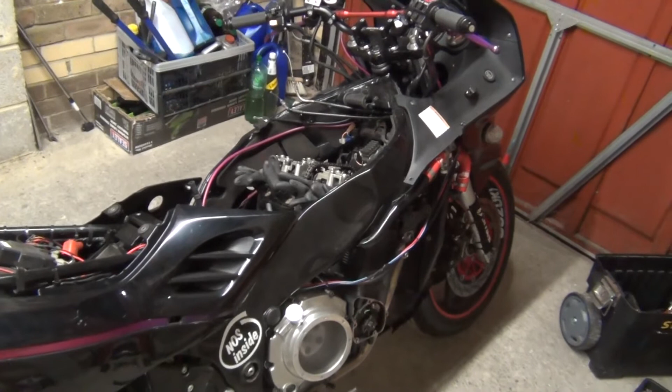Today I'm doing valves adjustment. So I highly encourage you to watch my previous video relating to this subject, which was valve clearance check. You can find this video in the description box here, or just rummage through my channel.

In that video I showed how to remove every single component required to be removed to do the valve clearance check. So this is going to be removing the fuel tank, airbox, carburetors, ignition coils, valve cover, right hand side fairing, and the signal generators cover as well.

Once you have everything exposed, you'd want to block those cylinder head inlets here with some rag or whatever, just to make sure nothing drops in there. And now I'm going to perform once again the valve clearance check, and then I'm going to do the adjustment procedure too.

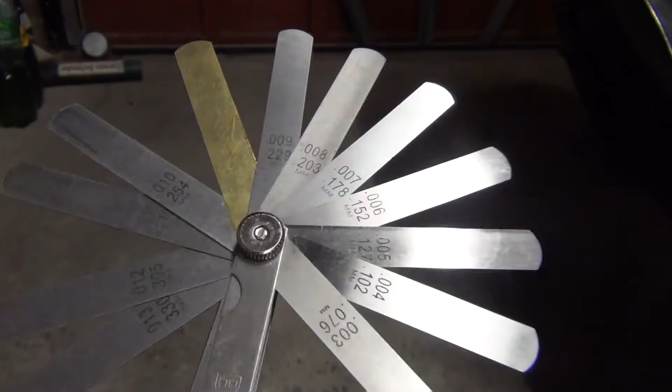Right, so for the RF900, the service manual specifies what would be the safe range for the valve clearance for intake and exhaust. So for the intake, this would be from 0.004 of an inch up to 0.008 of an inch, and for the exhaust that would be from 0.008 up to 0.012 of an inch.

So why would you have two values on those feeler gauges? The top value, like this one, .008 for instance, this is fractions of an inch, and the bottom value, it says mm here, that's fractions of millimeter. So you can do it whatever way you want. If you feel more comfortable with inches, go with inches. If you feel more comfortable with millimeters, go with millimeters.

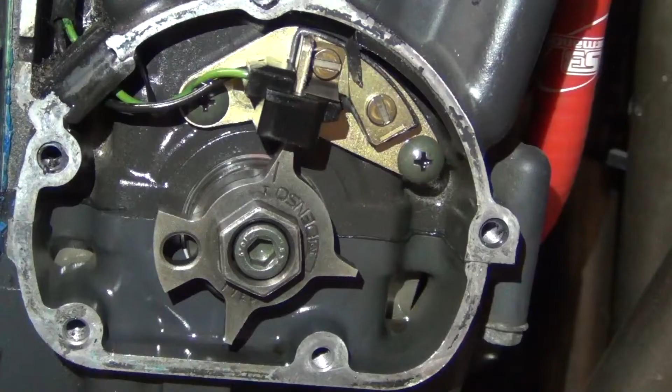Okay, so first step, you've got to bring your T mark. You see there's a little letter T just here with a little line pointing towards this pickup coil. This is the position that you want. So by using a 19mm spanner, you grab this signal generator and you basically turn it clockwise to get the desired position, and that's what you want. T mark pointing towards this pickup coil.

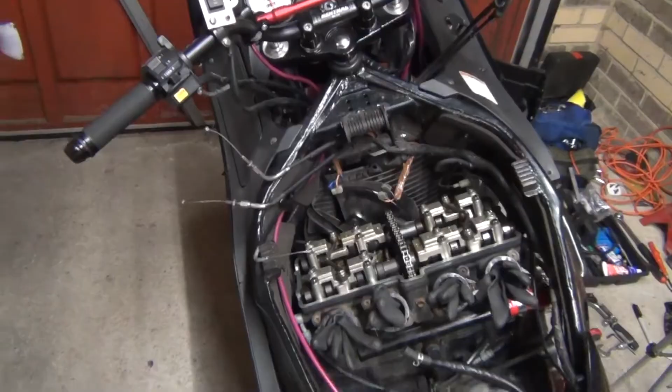And then you've got to make sure that the camshafts are also set up in the correct position. So let me show you what this should be. Alright, so going towards the right hand side of the motorcycle, you will see intake camshaft here, exhaust camshaft there, and what you want is you want the lobes to be pointing towards each other. So you see this intake lobe is pointing towards the front of the motorcycle, and this exhaust lobe here is pointing towards the rear of the motorcycle. So they're pointing towards each other.

And just to make sure your camshafts are 100% correctly positioned, on their sides there's going to be timing marks, and they should be positioned like this.

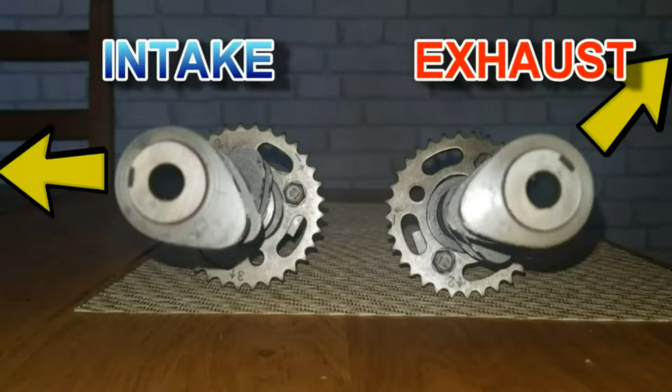Okay, so with this position of camshafts and crankshaft, and with the T mark pointing towards the top, we're going to be measuring what's circled red, which is exhaust valves on cylinders 1 and 2. So this is going to be 1 and 2, and intake valves on cylinders 1 and 3. So this is going to be 1 and 3.

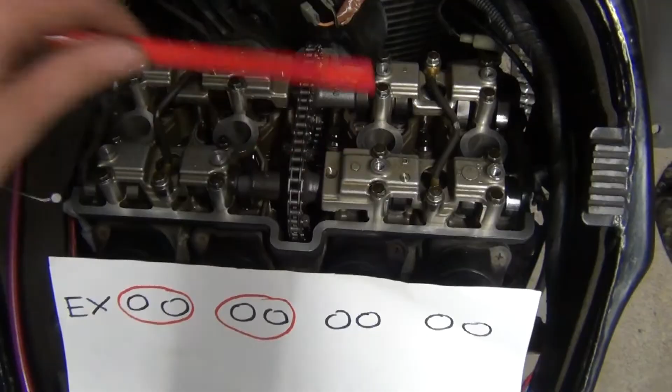Okay, so I'm going to start with the exhaust side, cylinder number 1, and the specification for those valves is at least 8 thou of an inch, which is 0.203 of a millimeter. So let's put it in. It goes in very easily.

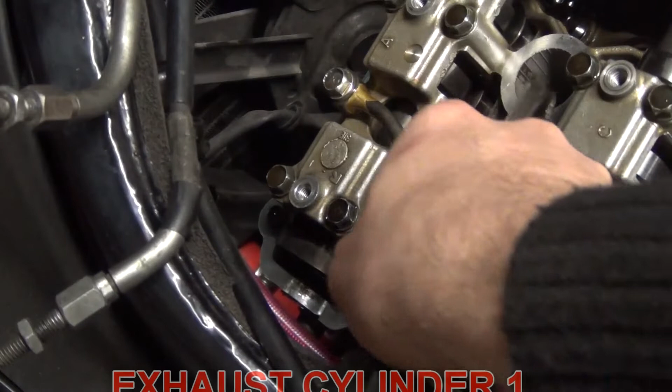And the reason why we start from the bottom is because we want to make sure the valves aren't too tight. When your valves are loose, that's not ideal, but it's not going to harm the engine. When your valves are too tight, it's bad news. So we always want to check that the valves aren't too tight. So we know this valve is definitely not too tight. So we can now go ahead with 10 thou, which is 0.254 of a millimeter. And that fits easily too.

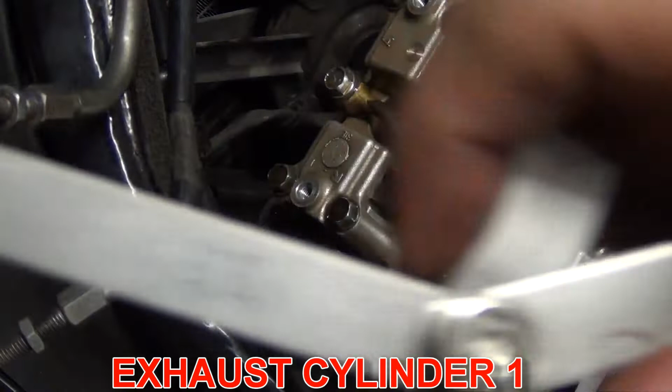Okay, so I'm gonna go straight over to 13 thou, just to make sure they're not too loose, because the maximum specification for those exhaust valves is 12 thou. So let's have a look if the 13 goes in, and it does not. Let's see if the 12 thou goes in, which is the maximum specification.

See? And 12 thou goes in with a drag, so I actually have to force it a bit, but not too much. So we can then say that those two valves on cylinder number 1 on the exhaust side are 12 thou. Okay, so we've just measured cylinder number 1 exhaust side, and what we've got was 12 thou of an inch on both valves.

I'm going to record the inch values at the top here, and I'm going to record the millimeter values here at the bottom. So that was 0.305, 0.305. Alright, so we've measured the cylinder 1 on the exhaust side. Now we're measuring cylinder number 1 on the intake side. And the difference here is that you're going to be putting the feeler gauges in from that side.

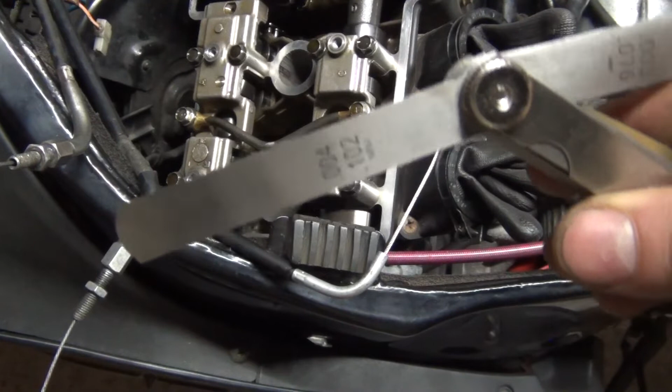Okay, so the bottom specification for the intake valve is 4 thousandths of an inch. So let's check that. It goes in very easily. Same on the other one. So we know that the valve isn't too tight. So I'm now going to jump straight onto 7 thou, which is 0.178 of a millimeter. Let's see if that fits. That fits for the first one. And that fits for the other one as well.

The top range for the intake valve is 8 thou of an inch, which is 0.203 millimeter. Let's see if that goes in. It does. Okay, right, so let's check the 9 thou, which is 0.229 of a millimeter. And that goes in with a drag. Okay, let's just make sure that 10 thou doesn't go in. So 10 thou, which is way over the specification, and that doesn't go in

both. Alright, so we've just measured cylinder number 1 on the intake side, and the left valve was 8 thou of an inch, so 0.008, which is 0.203 of a millimeter, and the right valve was 9 thou of an inch, which is 0.229 of a millimeter.

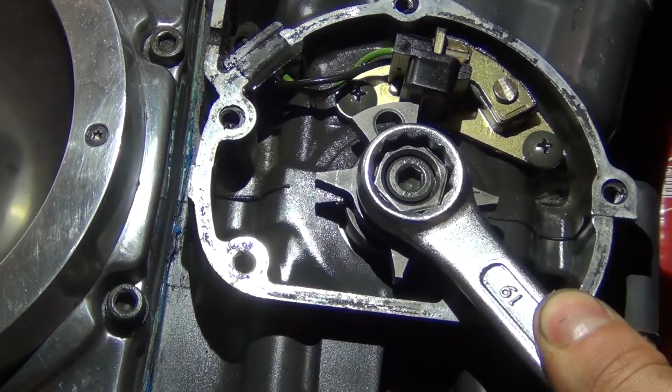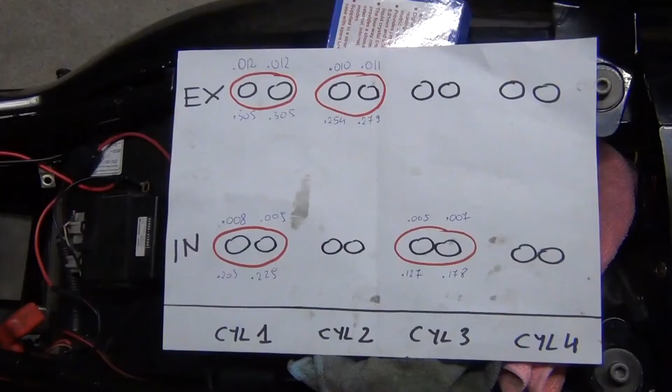So to measure the clearance on the 8 remaining valves, this rotor has to be turned 360 degrees clockwise. So once again, we've got a T mark pointing towards the pickup coil. Let's do that now. Okay, so it's in the same position but turned 360 degrees. And have a look at the camshafts now. Right, because we've turned the crankshaft 360 degrees, the lobes on the right hand side of the engine are pointing away from each other. Now with this position of crankshaft and cams, we're going to be measuring clearances on the remaining cylinders, which is cylinder number 3 and 4 on the exhaust, and cylinder number 2 and 4 on the intake.

Okay, so I'm going to start with the intake side on cylinder number 2, and we're going to go with the bottom of the range, which is, hopefully you can see this, 4 thousandths of an inch, which is 0.102 of a millimeter. So on the intake side, we attack the valves from this position. Goes in really easily for that valve. Goes in really easily for the other valve too. Okay, so 5 thousandths, which is 0.127 of a millimeter. Goes fairly easily on that side and on the other one as well. Okay, there we go. We're going to 6 thousandths.

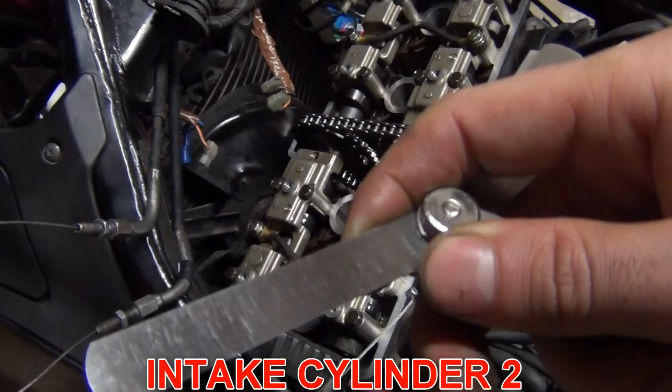Still goes in. Oh, actually it will be very hard. Let's just check 7/1000 on the left valve. No, it wouldn't go in. So we can call it 6/1000 on both valves.

Okay then, so I've measured all the valves and I think I'm going to go with adjusting 4 of those. It's the valves with little red cross inside them. So I'm going to adjust those two, and then on the intake side I've only got 2 valves, which is the right valve on the cylinder number 1 on the intake, which was 9/1000, just a bit too loose, so I'm going to get this down to 7, maybe 8. And then weirdly, left valve on cylinder number 3 intake side is, I wouldn't say it's extremely tight, but you know, 5/1000. I would want it to be 6/1000 to be perfect.

To make valve adjustments, unfortunately you have to remove a lot of components. So we're going to start with removing of the cam holders. Then you're going to have to remove the cam chain tensioner, which is just there. And then you're going to have to remove the camshafts, and on top of that you're going to have to remove the tappets to get access to your little shims.

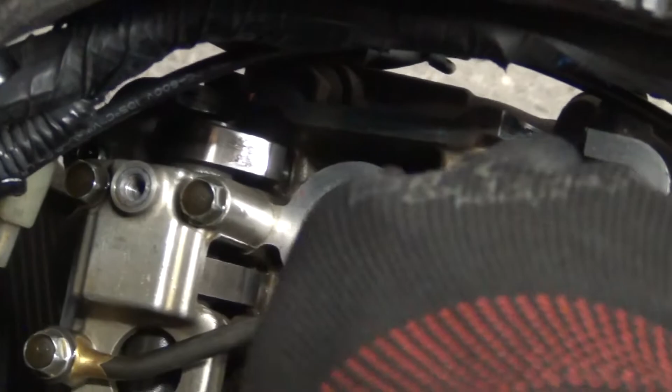First, let's just bring the T mark to the top again, and the camshafts have to be in the starting position, which was both lobes pointing towards each other. So this is the intake lobe pointing towards the front of the motorcycle, and exhaust lobe pointing towards the rear of the motorcycle.

Little tip, you've got to have your inlets covered with something just to make sure nothing drops inside the engine. And as you can see, I've got a little rag there just below the cam sprockets, and that's because there's a big hole which exposes the crankshaft. So what might happen is you might accidentally drop a tool or a bolt or a socket inside there, and then it's game over. So I've got a little rag over there just to make sure nothing drops in there.

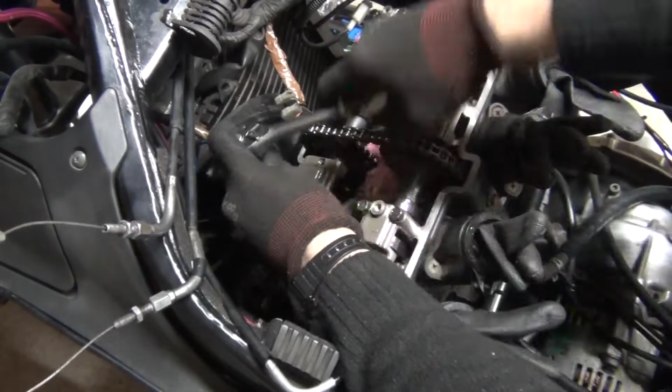Just half a turn to make it released. Just half a turn. Again. The thing is, you want to release that stress from the head really evenly. A few moments later. So first I'm going to remove those oil pipes.

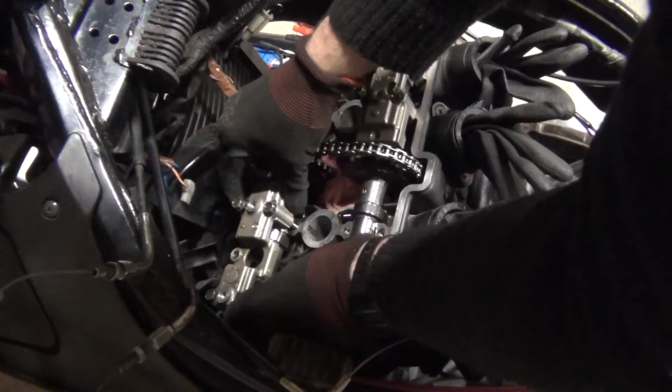Now I'm going to be removing the cam holders. So just a bit of a wiggle action gets them out. Okay, and that one. All right. Okay. And the next one comes out. Excellent.

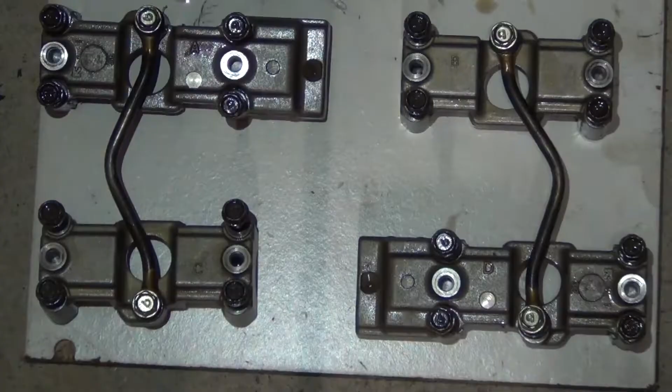And you see, this is what I was talking about. Look how close it was to drop this dowel pin somewhere in the engine. So you've got to be really, really careful and pay attention to what you're doing. Of course, it's very much recommended that you keep them exactly the same way as they came out. So you see, this is your cam holder A. This is your cam holder B. Then you've got C here and D here with oil pipes exactly the same way as they came out.

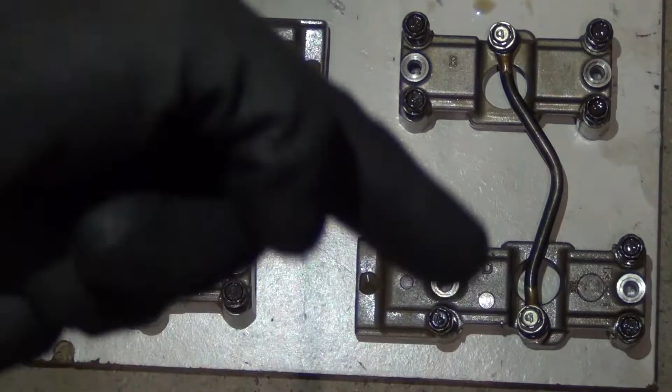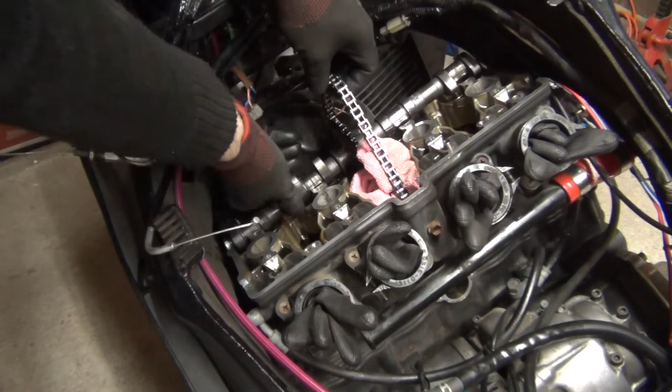Go by hand now. There we go. A little pop and the tensioner comes out. Okay, so we can now finally remove the camshafts. So I'm going to start with the exhaust side. I'm going to lift this chain here, get it off the sprocket and delicately rotate the cam and get it out. I'm going to do the same with the other cam. Excellent. And just not to drop this chain, I'm going to attach it to that hook here.

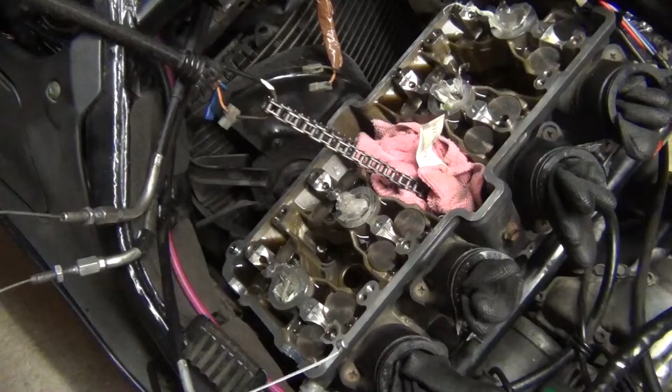Right, so just about to remove the tappets so we get access to the shims. So as you can see, you've got your tappets here. This is 1, 2, 3, 4, 5, 6, 7, 8, and then 8 tappets on the exhaust side as well.

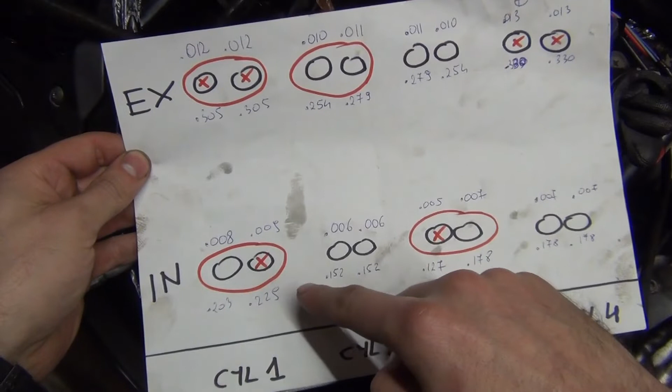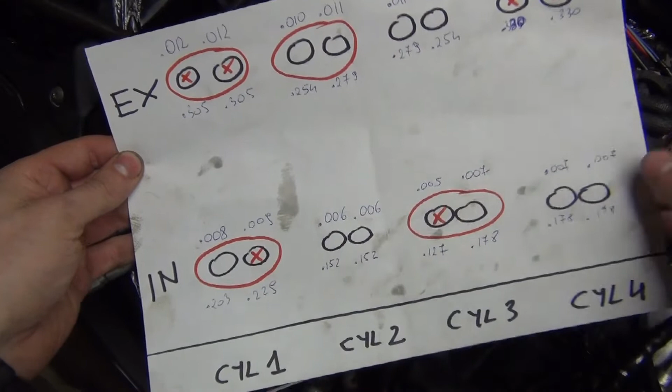So just looking at the diagram, we're going to be removing tappets to expose intake cylinder number 1 for the right hand side valve and intake cylinder 3 for the left hand side valve. So to do that, you're going to have to use a magnet. I've got this really cool magnet with a little light at the end of it. So this is the tappet that we're exposing.

It simply lifts up, and be careful because there's a shim just underneath it, so you don't want to drop it anywhere. So be very, very gentle and slow. And here we have it. There's your little shim underneath it. So let's now remove that little shim. Now that's what it looks like inside with the shim removed.

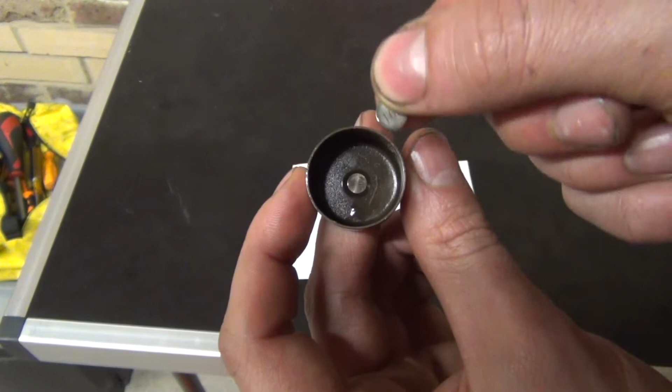And as you can see, on one side you've got that little circle, but on the other side you actually have a value stamped. Now in many cases those values will be wiped out. Unfortunately you won't be able to see them because constant tapping of the valve on that tappet will cause friction and that number will disappear, but in this case we can actually see that it's 165.

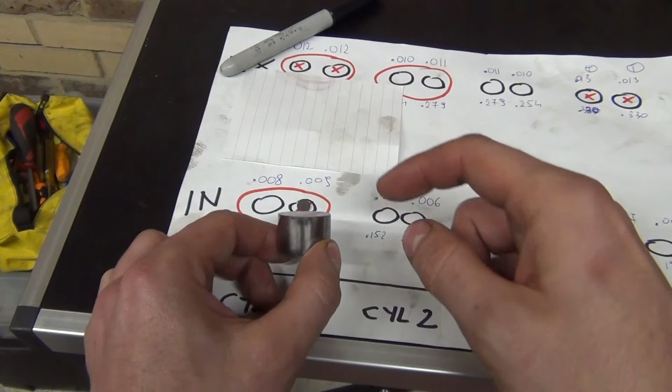Okay, so here we have our shim on that valve that was slightly on the loose side. As you can see, the measurement was 9 thousandths of an inch, which is equal to 0.229 of a millimeter. Now to reduce that clearance between the tappet and the cam lobe, so imagine my finger is a cam lobe, we would have to put in a thicker shim. A thicker shim under this bucket would cause the bucket to go up, meaning the clearance between the two gets smaller.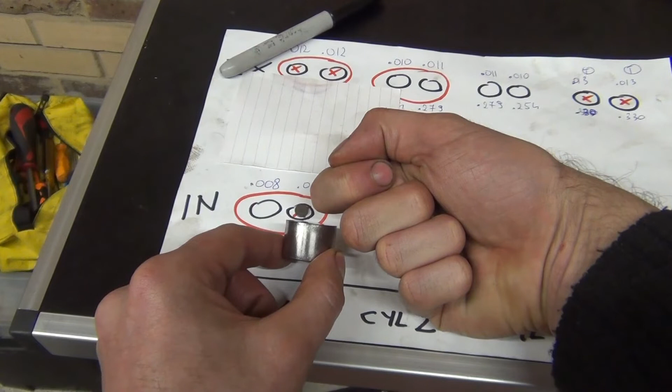Now, if you had not enough clearance and you wanted to increase the clearance, obviously you will be putting in a thinner shim, which would mean that the clearance increases because the shim underneath is thinner. Now Suzuki gives you an assortment of shims and they go up in increments of 5 hundredths of a millimeter. So this particular shim is 1.65 of a millimeter. If we want to reduce that clearance, we can go up one size, which is 1.70 of a millimeter. Alright, so let's just have a look at that.

So what we know is that with the current shim with a thickness of 1.65 millimeter, our read clearance was, as you can see here, 0.225 of a millimeter, and we need to reduce that clearance by putting in a thicker shim, which is 5 hundredths of a mil thicker, 170. Then we will know that 0.225 of a millimeter minus 0.05 will be equal to 0.175, which is our desired thickness. As you can see here, 0.175 is about 7 thousandths of an inch, which is in the middle of the specification.

Alright then, so here we have another tappet, which will have the shim inside. This is from cylinder 3 on the intake side, left hand side valve, which read 5 thousandths of an inch, which was 0.127 of a millimeter, which to me is still okay because it's not very tight, but I would rather prefer this to be 6 or 7. And let's have a look what's going to happen here.

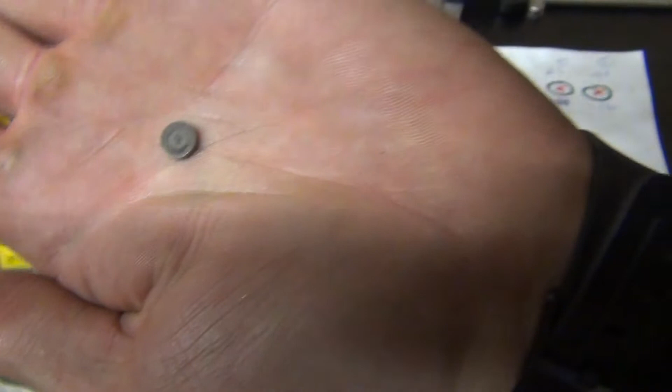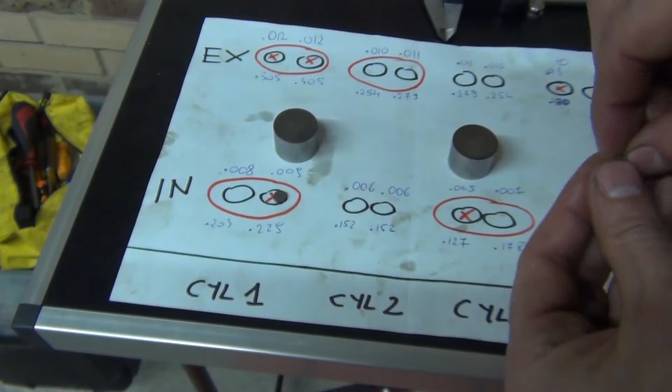So here's your shim inside, and if I now remove it, what you'll see is that on one side there's nothing that you can see, and on the other side the numbers are washed away. You could probably try to read this, and I think it's actually saying something like 130 or 160, one of the two. But to be 100% accurate, you would have to use what's called a micrometer.

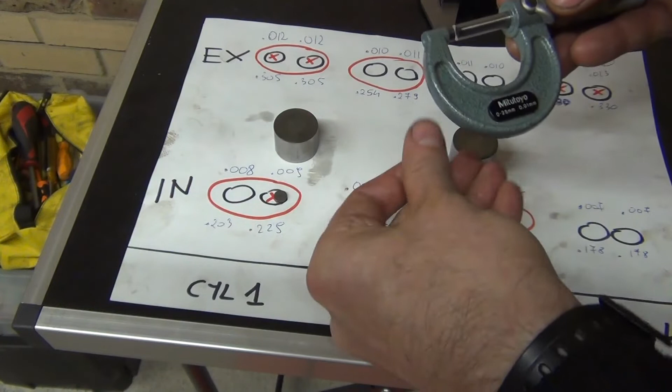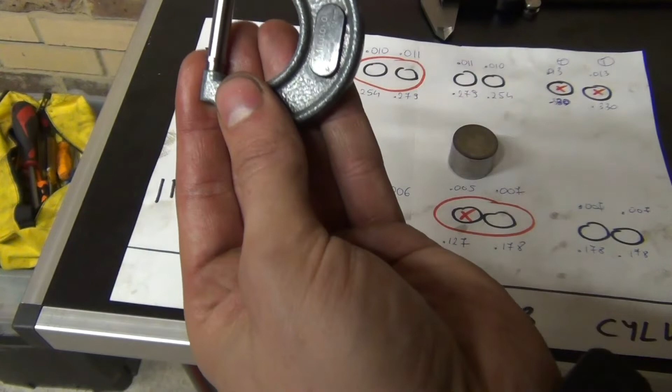So let's just have a look what the actual thickness of that shim would be. So you would just put it in here. First of all, you would clean your micrometer and your shim, but you would put it in here in a way that the shim is in the middle, and then you would lock this all up. Okay, and I can tell you now that this reads 161, so that's basically a 1.6 millimeter shim.

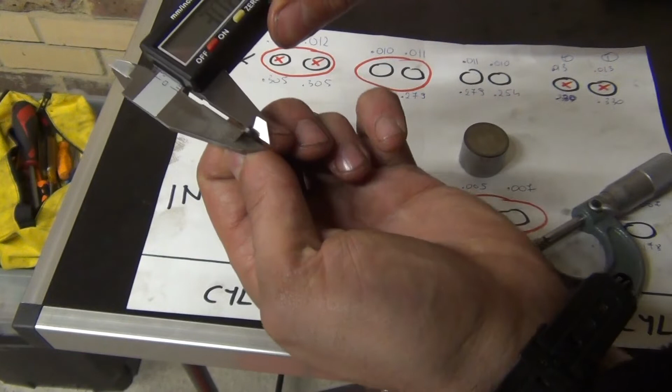And just to make sure that my reading was correct, I'm going to confirm it with the electronic caliper. So get it all on, zero it, and let's see what we've got. There we go. So we know that our shim is 160.

Okay, so we know that the thickness of that shim on the intake valve was 1.6 of a millimeter, and we know that the clearance was too tight because it actually was 0.127 of a millimeter. So we want to increase the clearance, which is the exact opposite to what we did here.

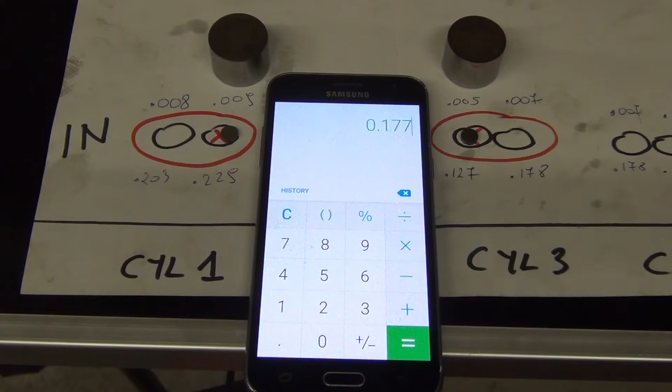Now, to increase the clearance, we would have to put in the thinner shim, meaning we've got to reduce the thickness of that shim. We know that the shim was 160, so we will go with 155, which is 0.05 of a millimeter more clearance. So we will basically add that to this number, and we will come out with a value equal to 0.007 of an inch, like here. That's what we would want.

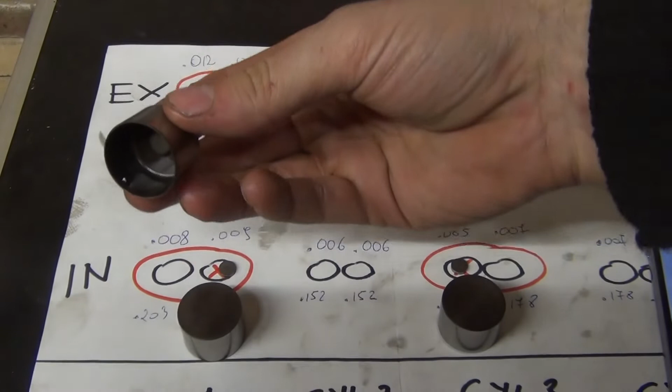Alright then, so here we have it. Here's another tappet. This was taken out from the first cylinder, exhaust side valve on the left side. So let's just get the shim out.

And what we can see again is that there are no numbers there because they're washed away. So we're going to have to use the micrometer again just to measure the thickness of the shim. So let's see what we've got here. Okay, so that reads, let's have a look, that reads 1.55 of a millimeter, 1.55.

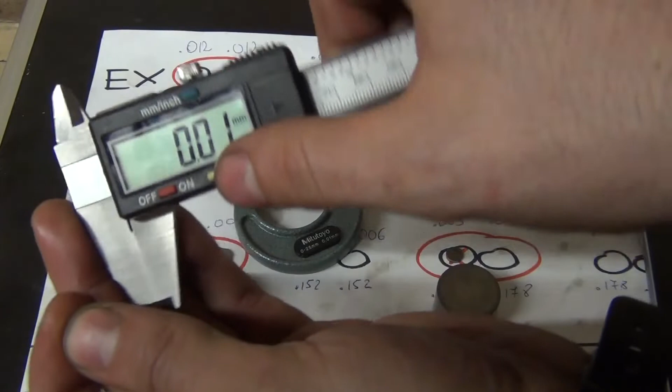And just to make sure, we're going to use the caliper as well. So get the caliper to zero. Come on. Okay, let's put the shim in. And here's what we've got, 1.55. Okay then, so the read clearance on that valve was 0.305 of a millimeter, which is way too loose.

We want to reduce that clearance, meaning we've got to put a thicker shim, which will get this tappet closer to the cam lobe. And by reducing this clearance by just 0.05 of a millimeter, so let's just take this away, 0.05, we will get 0.255 of a millimeter, which is equal to 0.010 of an inch, which for exhaust is right in the middle of the specification. So our needed shim here will be 1.6 of a millimeter, 160.

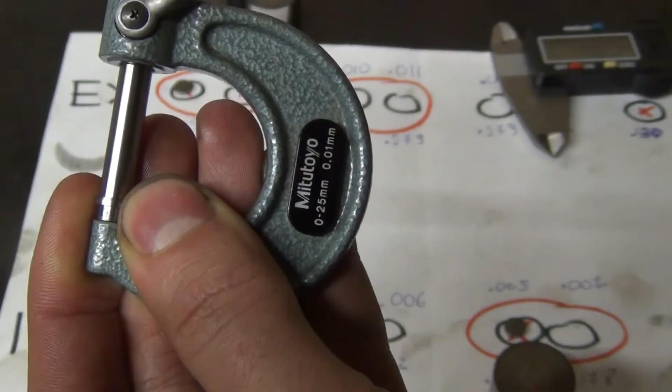Okay, so here we have another tappet. This is from the exhaust side, cylinder number 1 on the right hand side, and this is another very interesting example because the shim doesn't have any numbers on it. They're washed away. But I'm going to measure it for you with the micrometer, and what you'll see, okay, so that reads, let me have a look, that's 1.58.

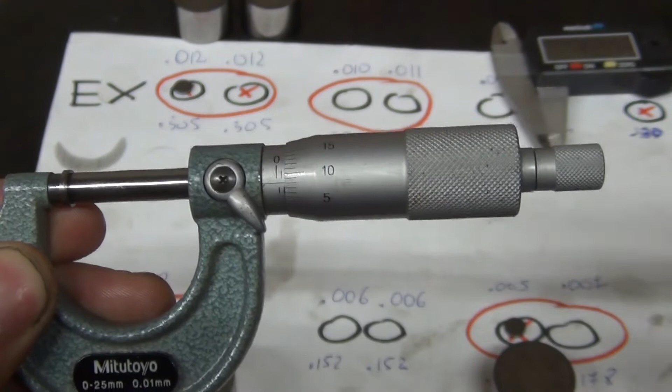Why is this interesting? It's because Suzuki claims all the shims go gradually up by 0.05 of a millimeter. So this would be 155 or 160. However, I got 158. So let's just confirm this with the caliper. Let's put this in the caliper. And as you can see, it actually does read 158.

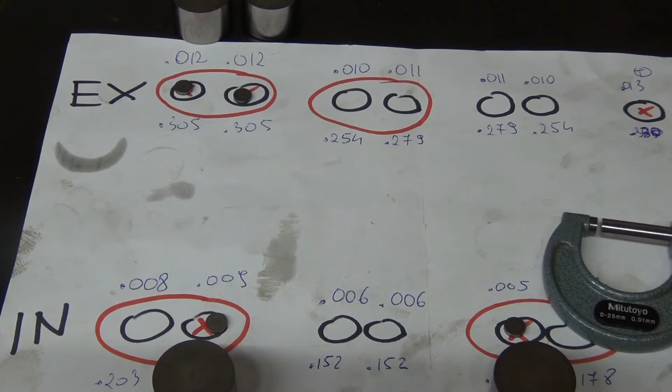So what happened was, this was probably a 160 shim, but because of the wear, it now got a bit thinner, so it reads 158. So the question is, what shim would I go for? And I think, just to be on the safe side, because I prefer my valves to be slightly on the loose side, especially on the exhaust, because they get very, very hot, so you don't want to burn them, I'm just gonna go safely with, again, just the original 160 size.

Alright then, so here's what we've got. 6 valves to adjust. There's going to be 4 on the exhaust side, 2 on the intake side. So here, in those circles in orange, you will see the current size of the shim on those valves. And here are the new shims that I purchased. As you can see, they've got numbers nicely visible. Those are two 160s and one 170.

So why did I only purchase 3 shims? Because the other 3 are actually here. I'm just going to reshuffle the shims. So let's have a look. Let's start from the exhaust side. First valve is the cylinder 1 exhaust valve on the left. So the current shim is 155, and to adjust the clearance I need a 160 shim. So here we have it. There's 160. So I'm just going to replace that, and I'll put 155 just here so I know what shim is available.

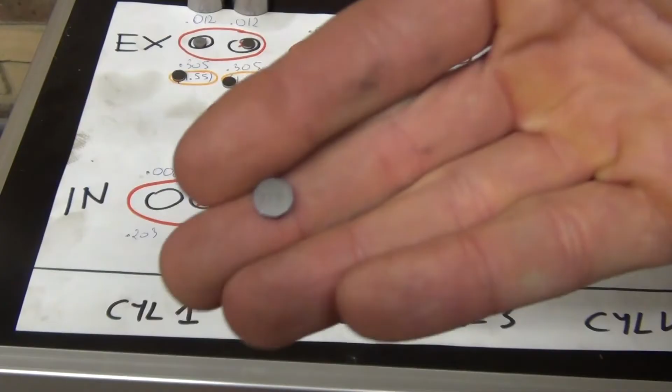There we go, next valve here. So the current shim is 158, and to adjust that I once again need 160. So I'm gonna move 158 here and put 160 here. Okay, the next valve is gonna be the exhaust on cylinder 4, the left valve. So current shim 155, and what I need to adjust that is the 160. So I haven't got any more 160s from the fresh ones, but I know that this here is 160, and that needs to be changed too. So I'll simply move that 160 onto here.

There we go. And then again, on the last valve on the exhaust side here, current shim is 152, and what I need to adjust that will be the 155. And let's have a look if I have 155 anywhere. And I've got 155 here because I just moved it from there, so I can simply move this away and put 155 here, and I know that this is 152.

Okay, so let's go for the intake. So current shim here is 165, and to adjust that valve I'm gonna need 170 shim, and 170 is the one that I purchased. Let's just have a look. There we go, that's my 170. So I'm just going to put 170 here and move the old shim just here.

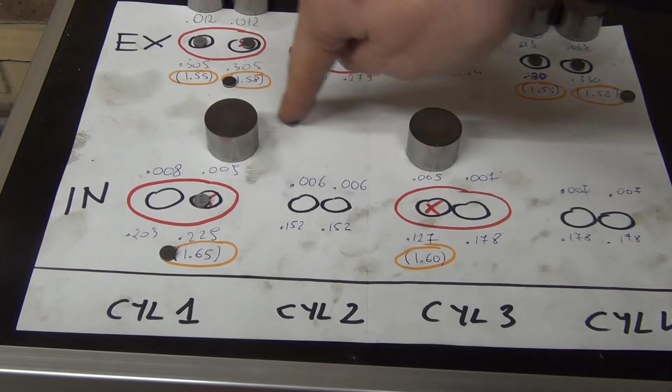And the last valve here, the current shim was 160, which I've moved there, but to adjust that I'm going to need 155. So let's have a look if we have 155 anywhere. There we go, I've got 155 here. So I'm just going to move it here. And we are done. Okay, so let's start putting it back together.

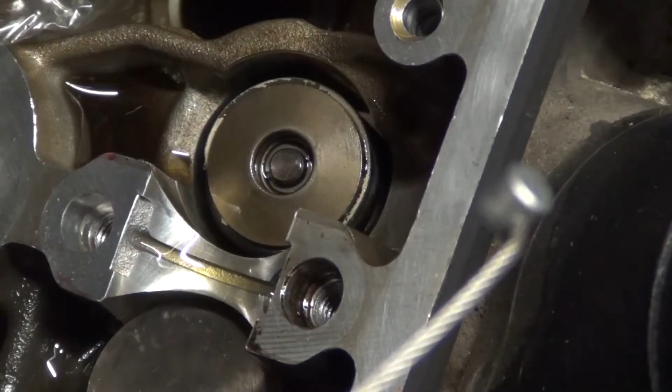Very important tip, all those tappets have to go back to the exactly same place as they came out. Okay, so just one little tip before you start putting your shims in. The service manual says that the shims have to be lubed both from the top and the bottom. I prefer to just put some oil inside there and then put the oil onto the tappet, and once you've got both ends lubricated, you're good to go. Okay, so we'll just put some oil in there.

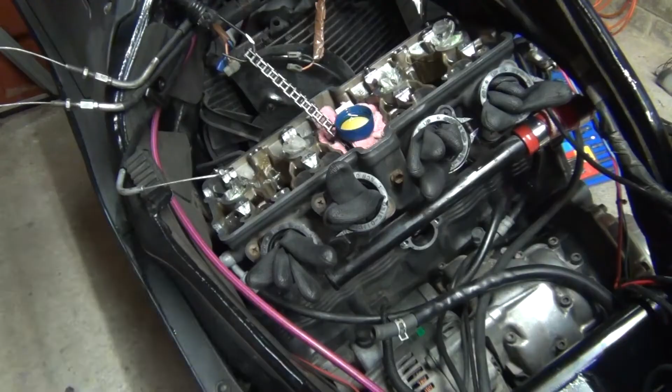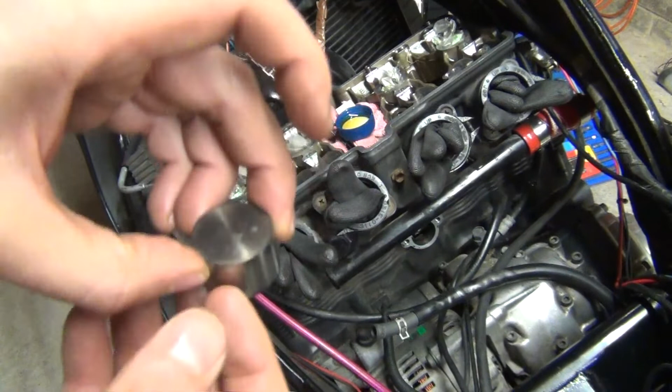Alright, so just remember that the side of the numbers goes towards the top. Now the tappet was nicely lubed, so I can now cover it. There we go. Right, so here we have it. This is going to be the next tappet for exhaust valve on the right hand side on cylinder 1. Once again, let's just get some oil in there. As you can see, the numbers 160, that's going to go towards the top. Shim is in. And then I'm going to cover it with the tappet.

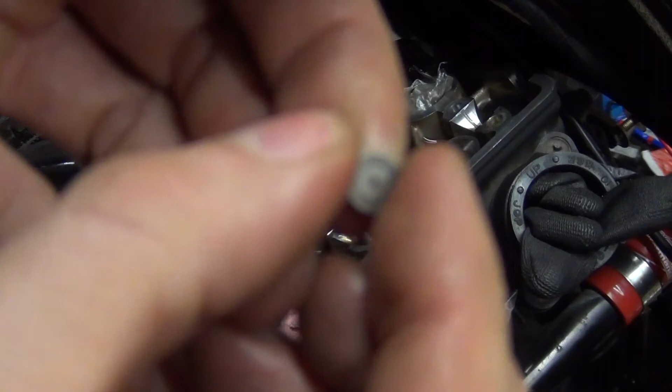There we go. Okay, so cylinder number 4 now on the exhaust side, left hand side valve, shim the number side towards the top. With some oil in there. Excellent. And hopefully you'll be able to see what I'm doing here. And the next one, so exhaust cylinder 4, the right hand side valve. Again, the numbers towards the top. And of course the tappet, nicely lubed.

And it goes in. The intake side, cylinder number 1, right hand side valve. Again, the numbers towards the top. So this is 170 shim. Simply put it in there. You can see it sitting there. Of course, some oil in there. And simply cover it. There we go. And the last one.

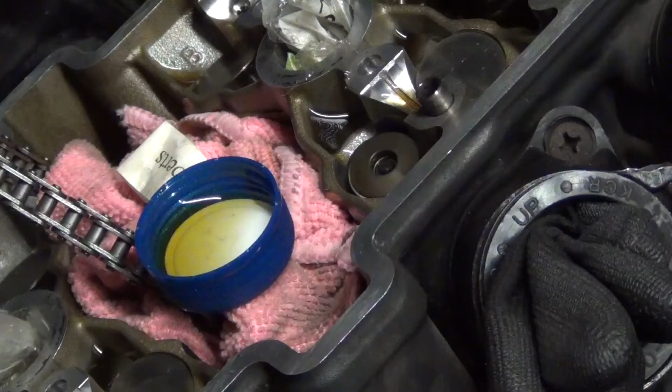Okay, so the last one, intake cylinder number 3, left hand side valve. Again, numbers on the shim towards the top. I'm going to lube those necessary parts here, which is obviously the tappets. Put some of it on here as well, where the cam journals will spin.

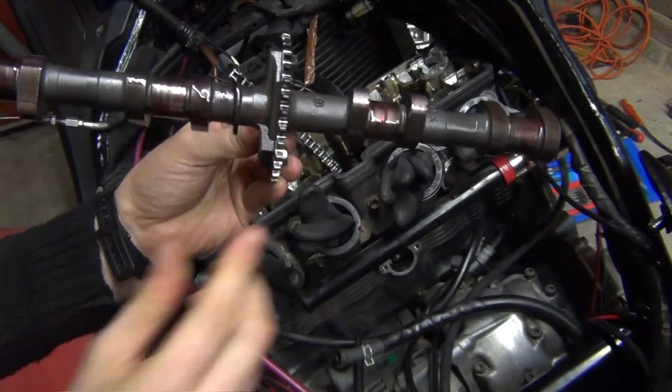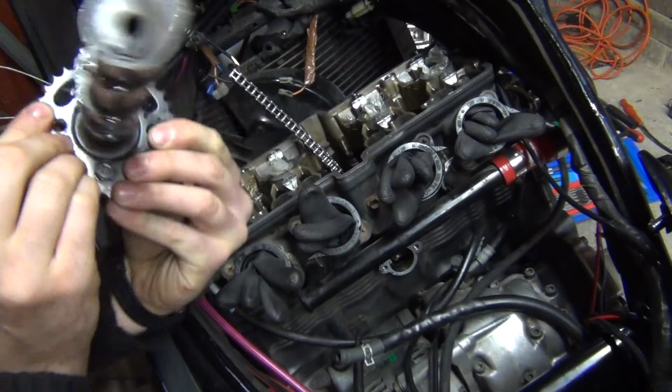Alright, so here we have the exhaust camshaft. I'm going to start with putting the exhaust in. So all the journals and all the parts of the cams that actually have some contact with the holders, so it's here, here, here, and that little ring here. All of it was nicely lubed, so you can see the red assembly lube on it. You could use oil if you don't have assembly lube, but I prefer to do it with assembly lube. Now the camshaft goes in.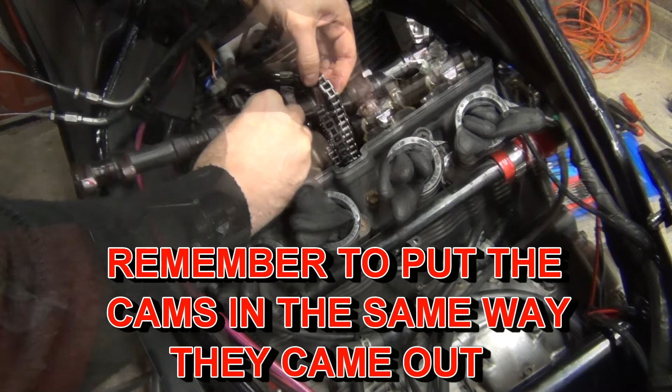Alright, now the intake cam goes in. Okay, so cams are in. Just about to put the cam holders back on. Just make sure that the camshafts are in exactly the same position as they came out. Now the second thing to check is also making sure that you've got your dowel pins here and here. And now simply put the cam holder on. And that will go in just like that.

Right peeps, so have a look at this. You see all those cams are now getting lower and lower evenly. And here's a little tip. If something feels not right, so one side will be higher, the other will be lower, and for whatever reason it doesn't want to come down, it's probably because, especially on those bigger holders, which is holder A and holder D, there's that little ring on the camshaft there, and that ring has to go in the groove in that holder, so probably it didn't go in.

In that case, what you've got to do is grab a spanner, put it here on the side, and just try to move this camshaft one way or another to get that groove aligned with that ring on the camshaft.

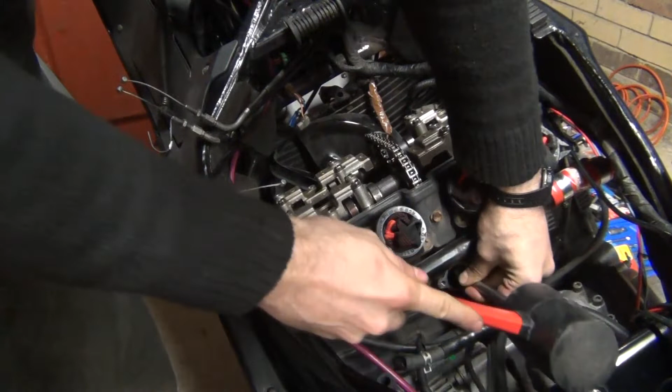Alright, so all the bolts are nice and snug. I haven't torqued them up yet. I haven't put the oil pads in yet, because now we're going to have to check the timing. So to check the timing, you're going to have to put your cam chain tensioner in. Before I put a cam chain tensioner in, what I like to do is use this extension, put it in there, lean over the slide, and tap it a couple of times gently, so installation of the tensioner is easier.

Inspect the gasket on this tensioner here. Make sure it's in one piece. There we go. So you can just start the bolts by hand. A few moments later. Now let's check if it all works.

What you've got to do now is you've got to turn the crankshaft 360 degrees, or ideally even 720, and look if it's turning nicely without any binding. If it suddenly stops and you can't turn it, that means that your timing is wrong. The valve is stopping the piston and the engine can't move.

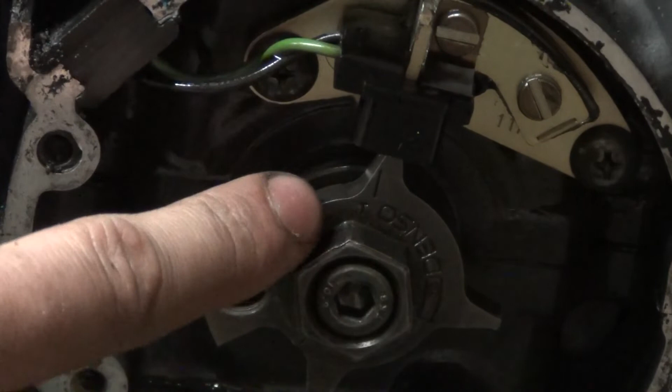This is our signal generator, and as you can see, the T mark is pointing right towards this pickup coil, and the cam lobes on the right hand side of the engine are pointing inwards. So what you've got to do now is you've got to turn it 360 degrees. There we go. And as you can see, it turns. It didn't stop me, so that means that nothing is stopping the engine.

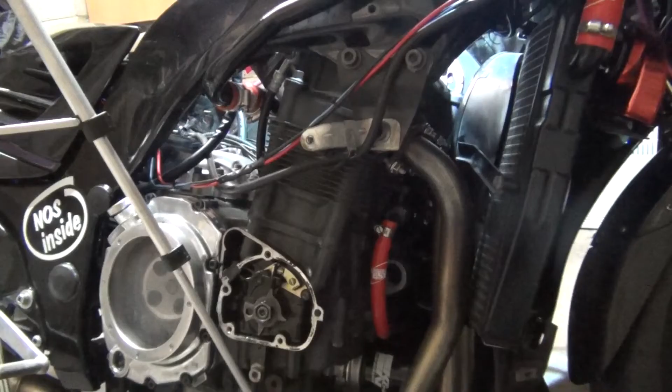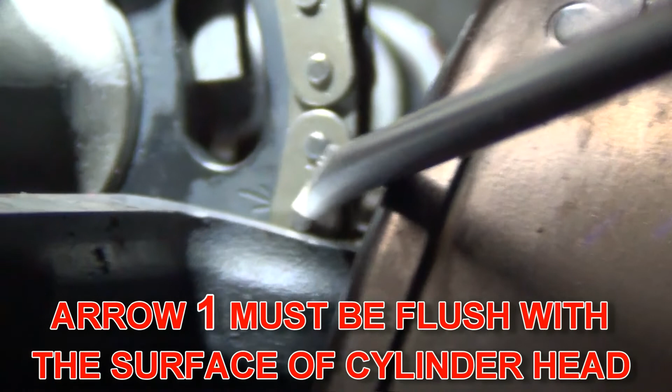And now this is the right hand side of the motorcycle. Have a look at the front camshaft, which is obviously the exhaust camshaft. Can you see this little arrow here on the camshaft? Okay, just here. That has to be flush with the surface of the engine. So that's the correctly positioned exhaust camshaft. Okay, so now we've turned the crankshaft 360 degrees. Obviously that means the cam lobes on the right hand side of the engine are now pointing outwards.

And now we've got to count the links on the cam chain between that arrow here. You see there's a little arrow on the sprocket, and there's a number 2 next to it, and that arrow here has a number 3 next to it. Hopefully you can see this. So you've got to count those links, and hopefully it's going to be 13. So let's count it. 1, 2, 3, 4, 5, 6, 7, 8, 9, 10, 11, 12, 13. That's perfect.

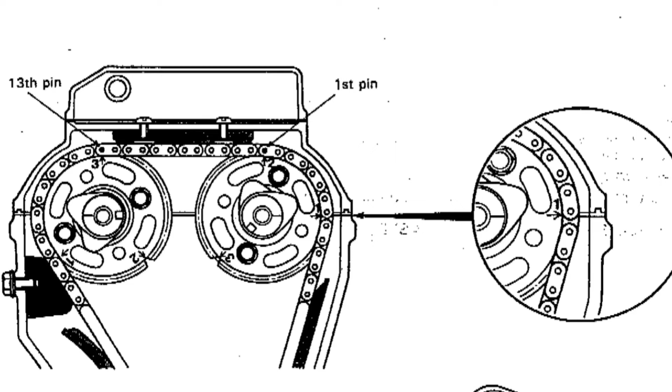Let's not forget about the very important step, which is torquing down all those cam holder bolts to 10 Newton meters. So I've got my torque wrench here set up to 10 Newton meters.

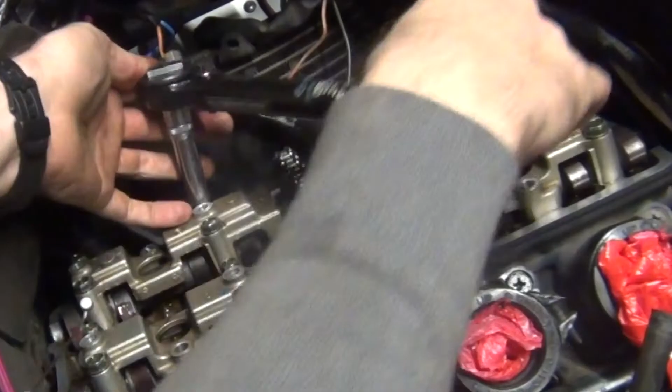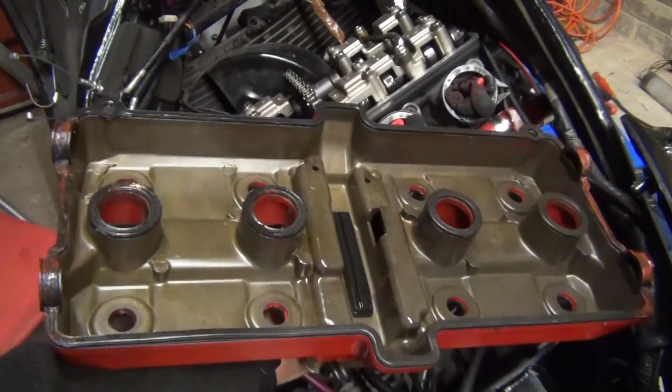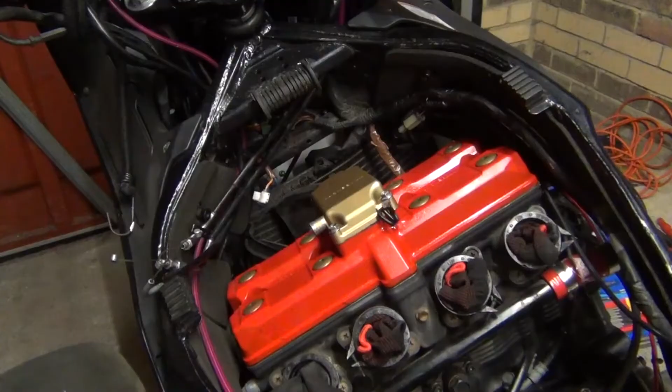Alright, so installation of valve cover. Just put a tiny amount of RTV in those points here. Remember that it only goes in one way. So this is towards the front. Alright man, so all the cover bolts are in, nice and snug. Now let's torque them down to 14 Newton meters.

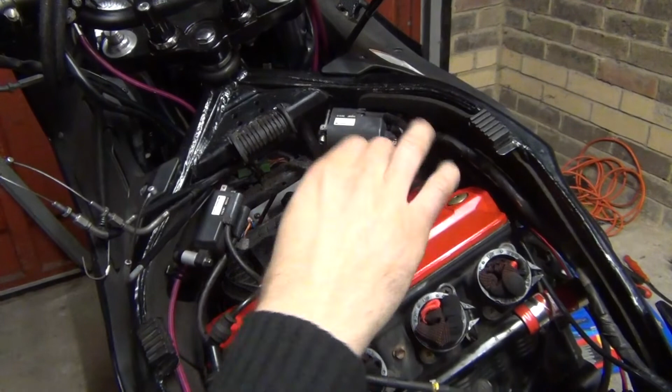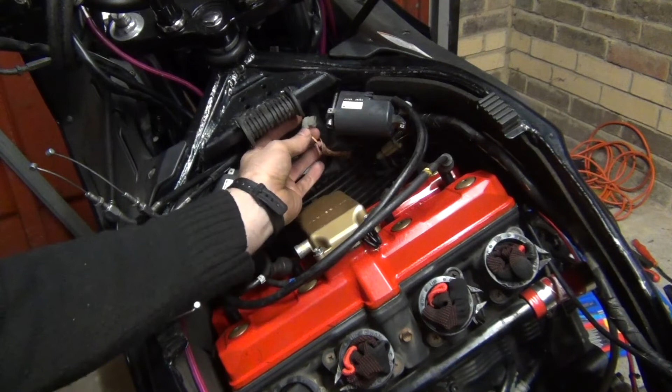Alright then folks, so then put your spark plugs in. I haven't filmed it because I thought I pressed the button to record, but I didn't. But obviously you know how to put the plugs in. So put the plugs in, then put the coils in. So the coils are bolted on. Now just put the cables in. And the last step, obviously connect your coils. Now you've got your signal generator cover. Simply bolt it on.

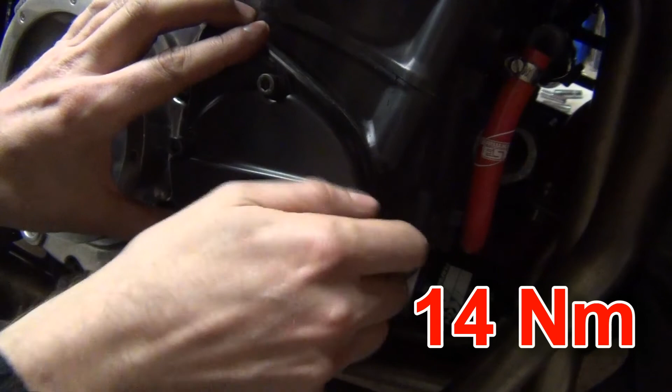Okay man, so at that point all the difficult stuff is behind you now. All you have to do is reinstall the carbs and airbox and put the fuel tank on. So I'm not going to bother with showing that. And by the way, I've done it on the video where I installed the GSXR camshaft.